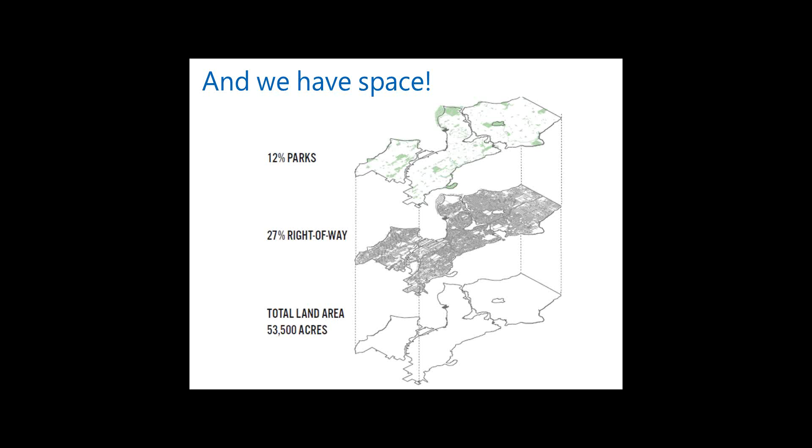So in 2013, we built a public space management program. In true Seattle fashion, we had a task force of 34 people, both internal and external stakeholders, and spent about 5 months defining the program's mission and goals, what's included in the program, and then prioritized a 5-year work plan, but tried to ensure we had enough flexibility to take advantage of opportunities.

As part of this program, we now manage about 40 different sub-programs and initiatives. Everything from alley activation to A-frame signs to farmers markets to newspaper boxes to parklets and beyond.

The other piece of building the program that I really want to highlight is our goals. We have 4 goals: to encourage, implement, innovate, and regulate. Part of what is so important about those 4 goals, and what's been really critical to the success of our program, has been changing the mindset within our department and division about how we manage public space and how we encourage people to use that space.

Public space management lives within our street use division, and that's the place where SDOT issues permits. For as long as most people can remember, street use was the place that you went to be told no. Sorry, we don't understand what you're trying to do, no. No, that's not about transportation, we can't help you.

So part of what we've done through public space management is really focus on our role as promoters and supporters of innovation as much as we focused on our role for regulation. So we're now a one-stop shop team. We develop programs, we implement them, we review permits, and we regulate. We enforce when necessary, but our goal is to work with people and not shut people down or stop people from doing what they want to do unless we really have to.

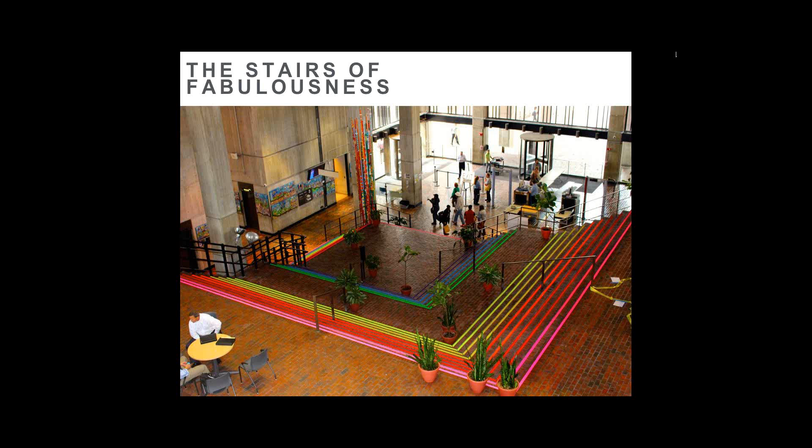This is what it looks like as of a couple months ago. We had the Stairs of Fabulousness project, which is skateboard tape. It was guaranteed to make City Hall 400% more fabulous by the designer, and the public certainly agreed with that.

Which is sort of lesson 2 we learned in that project: something as simple as putting down tape on stairs required a lot of legal counsel. Since then, as we've thought about doing this again, there are insurance questions we've tried to answer. We're setting up professional consultants for designers, architects, and artists who may not have done this type of work before, built into that award package.

The last part that we did around this project was we threw a party. We invited all the designers to come and hung up all their ideas. We invited the public and gave anybody who had submitted an idea an official button so they could go around and tout that. We gave everybody else free donuts and beer, which was an awkward combination, but people seemed to enjoy it.

And lastly, we gave the winners a green hoodie award. We were trying to mimic a little bit of the PGA Masters Tour, wanted it to feel sort of like an invitational. So we gave out these green hoodies to the 8 winners that we selected.

And this is kind of where we arrived, as we were reflecting on this project. This is the last lesson I'll share: it really wasn't about the project. This ended up being a trust exercise with the public and with the design and artist community. They saw that the city was really committed to actually improving public space with a small amount of money, but really trying to take their ideas and make them happen.

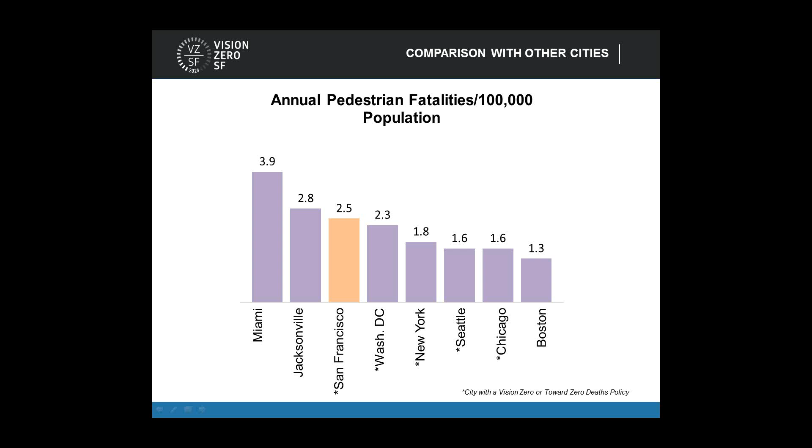There's a little asterisk under several of the cities that, at the time we created this slide, had either a Vision Zero policy or a towards zero deaths policy. And for a lot of folks out there, these things don't happen overnight, so I want to cover a little bit of the timeline of Vision Zero in San Francisco.

So when we look back to 2010, the then Mayor Newsom, who now is our Lieutenant Governor, issued an executive directive regarding pedestrian safety. That helped create a target and a multi-agency task force that really brought the Department of Public Health into the conversation with us at MTA. It created a greater sense of urgency and collaboration that we really needed within the city, with a goal of a 50% reduction of severe and fatal pedestrian collisions by 2021.

Going into 2011, San Francisco received a grant from the California Office of Traffic Safety to do the first phase of Walk First. It developed a framework for how the city was going to prioritize pedestrian improvements and created the first map of a high-injury corridor network within the city, showing the streets with the highest concentration of severe and fatal injuries, and also developed some draft policies.

Then in 2013, we had a new mayor, our current mayor, Mayor Lee, who as part of the nation's first Walk to School Day launched the San Francisco Pedestrian Strategy. This essentially reaffirmed the previous mayor's directive and added the targeted goals and framework that came out of Walk First. Then in 2014 was really the key year where Dana joined us on this project.

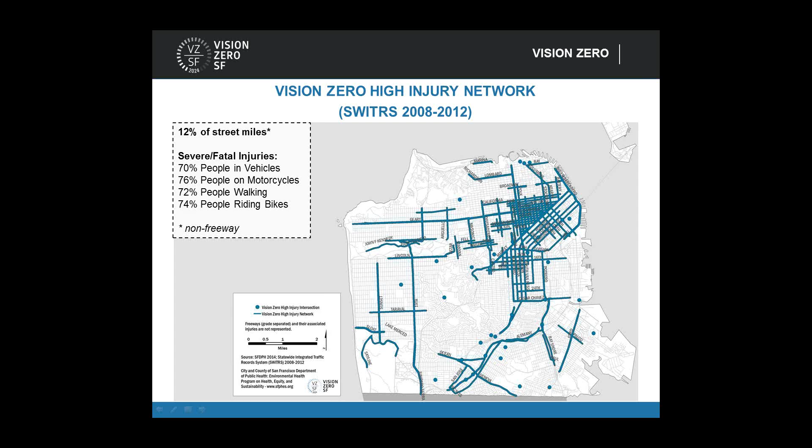So when you include all the modes within Vision Zero, we still see a distinct set of streets. We have now a focus of 12% of the streets within San Francisco where the majority of collisions are occurring. And that's our focus right now of Vision Zero, identifying our capital improvements on these streets. I'll end my point of the presentation with this slide that has our Vision Zero website.

Great, thanks Oliver. This is Dana Weissman now, and as Oliver mentioned, one of the most crucial building blocks of Vision Zero was the Walk First Pedestrian Safety project. Vision Zero in San Francisco really started with pedestrian safety, and Walk First was the city's first effort to define and prioritize its pedestrian safety capital projects. The goal was to develop a comprehensive and data-driven approach to replace the typical strategy of selecting projects ad hoc as they arose.

There were really two main questions that drove the Walk First effort. The first addressed the challenges of identifying site-specific capital projects on such a large city scale. And the second question addressed the funding challenge, how to make the most out of limited monetary resources. Fehr & Peers joined the effort in 2013, and we worked closely with the city team to develop a methodology that could help address these challenges.

The Walk First approach involved three basic steps. The first is to define the problem, where we generated collision profiles to describe the types of collisions that are most frequent and lead to the most severe injuries across the city, and also to identify where those profiles are most relevant. The second step is defining the solution. Here, through a comprehensive literature review, we identified the countermeasures that would be most effective at addressing the collision profiles defined in step one.

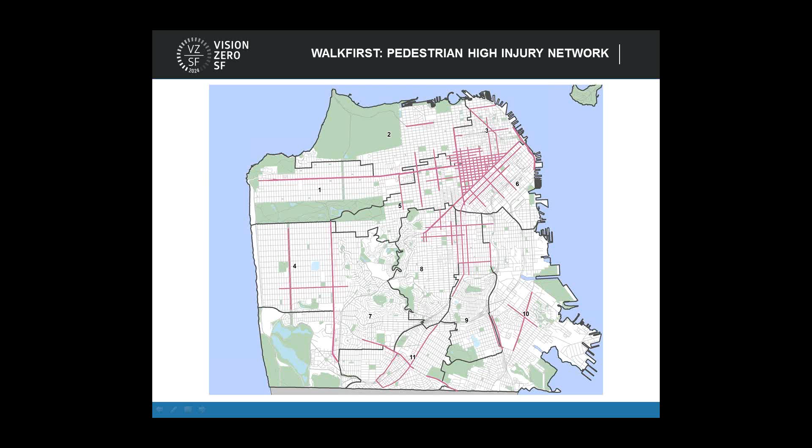We look to the data to determine whether the defining factors of a collision profile are present for a given crash, and if so, that crash fits the bill for a given collision profile. So for example, if a collision occurred at a signalized intersection when a driver made a left turn, the collision would be categorized under collision profile 4A, left turns at signalized intersections.

And we could map where across the pedestrian high injury network a collision profile was most relevant. So for this collision profile, left turns at signalized intersections, it described as much as 25% of all pedestrian injuries on the high injury network. It was the most common of the identified collision profiles.

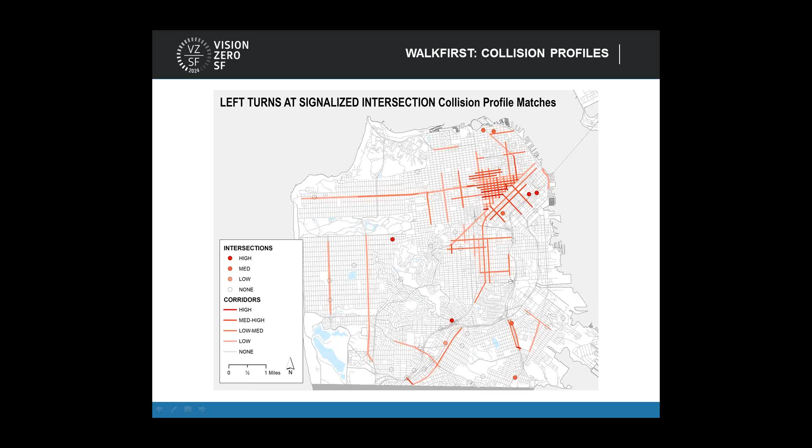The set of collision profiles was developed based on research of common causes of pedestrian collisions, local knowledge of the San Francisco street network, and an analysis of the frequency with which different collision factors appeared in the data. It was an iterative process. We used trial and error to identify a set of collision profiles that would be comprehensive yet focused enough to be meaningful. All of this information allowed us to categorize the different types of crashes occurring across the network, and it helped us tell a story of what was going on when people were getting hit. It also helped us define the solutions.

There are a number of possible treatments that could be applied at a given location, but some are more effective than others and work best under certain conditions. Some are also significantly more expensive to implement. Our challenge was to determine which countermeasures could best address the collision types we identified, then assign those countermeasures to the locations where they'd be most beneficial, and finally prioritize improvements that could be implemented at relatively low cost in a short time frame.

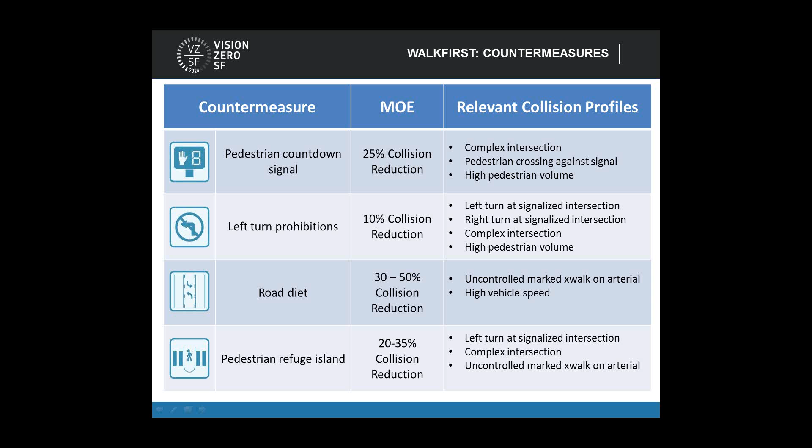We conducted an extensive literature review to quantify the effectiveness of every countermeasure and identify under what conditions they'd be most relevant. We compiled cost data to determine how much money would be needed to implement each treatment, and looked to example projects to estimate a time frame from planning to construction. Armed with this information, we were able to apply the most effective treatments where they were most needed to address site-specific issues.

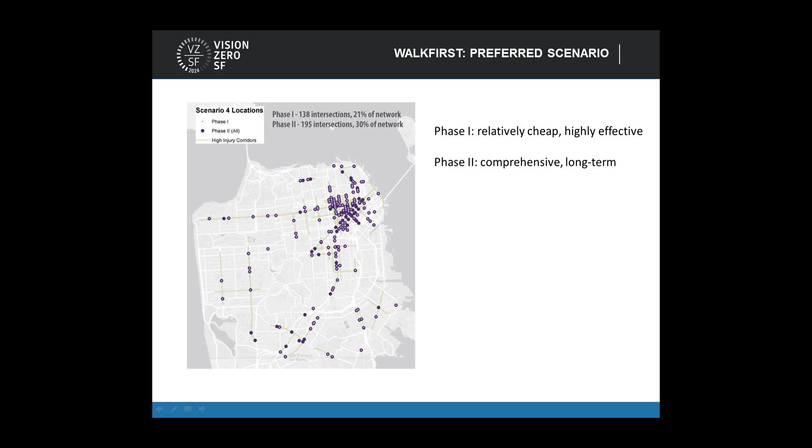So what we ended up with was a very long list of capital improvements to implement across the high injury network, but we still needed a way to prioritize these projects. We hosted charrettes with city decision makers to identify the metrics the city wanted to use to prioritize pedestrian safety projects. What came out of those discussions was a preference to first tackle projects that could be implemented cheaply and with high effectiveness, often with temporary measures, followed by a long-term rollout of more permanent projects addressing the most severe crashes. This process generated a recommended investment strategy for the city.

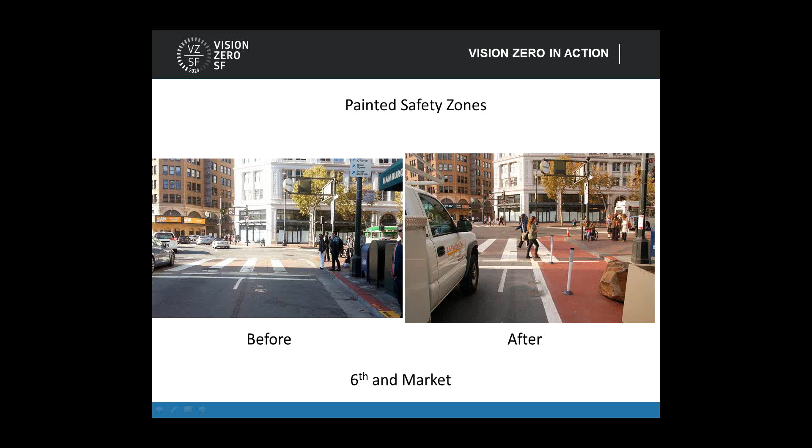I want to bring this back to Oliver's portion and show a recent example of a priority pedestrian safety project identified through Walk First that has now been implemented through Vision Zero. In addition to painted safety zones, the city has also begun to implement corner daylighting in the Tenderloin neighborhood, continental crosswalks across the city, and no right turn on red policies at selected intersections. These are just a few examples of Vision Zero in action.

And so that's it for our presentation. We're happy to field questions that people have now, and definitely please feel free to reach out if you want to talk more about Vision Zero or Walk First.

Good afternoon, everybody. This is David. I'm going to do most of the talking through the presentation, and when we get to questions, Ross and I are both available to answer those. We're here to talk to you today about our experience over the last several years designing intersections for protected bike lanes in Vancouver.

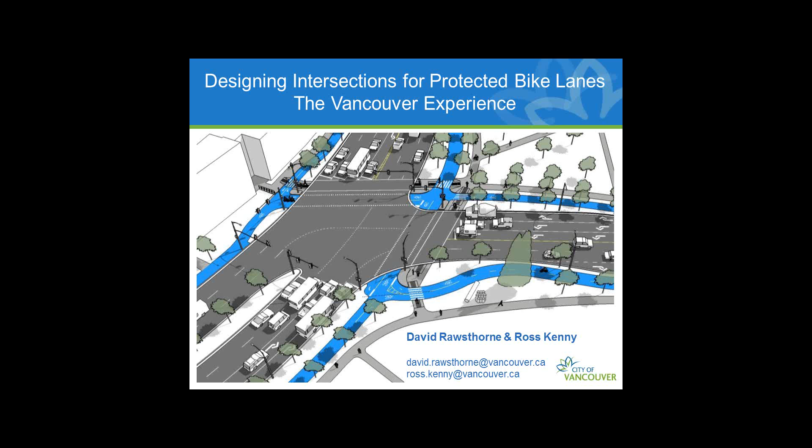The reason we think this is an interesting topic is that over the last several years there's been materials published that have given those of us who design these kinds of facilities better guidance about how to design protected bike lanes—documentation from Denmark, from the Netherlands, from Velo Quebec in Canada, and NACTO's Urban Bikeway Design Guide. They're all huge steps forward to help us do our work.

But one of the things that most of these design guides do is talk about protected bike lanes on the block, between the intersections and approaching them, but there's limited guidance as to how to deal with getting bikes safely through intersections, particularly intersections that connect to protected bike lanes.

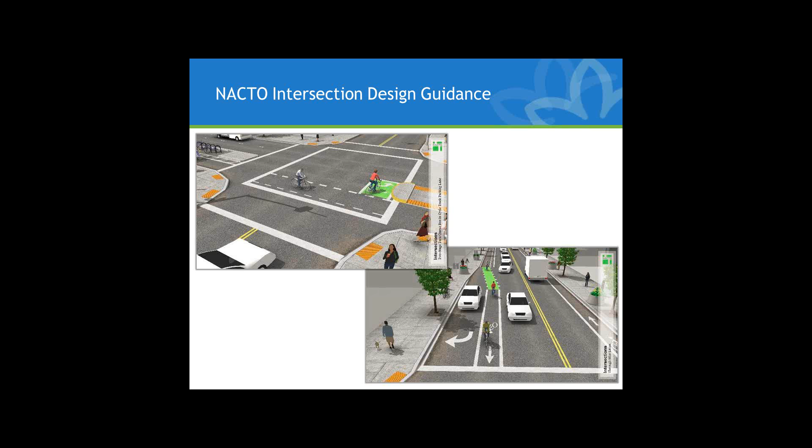These two photos are from NACTO's guide. The one on the bottom right is approaching an intersection. The one on the top left shows a single protected bike lane and how cyclists could transition through an intersection to make a left turn, but not all the movements that a typical intersection for cars would provide for—through, left, and right movements from all four directions.

Many of you may be familiar with an excellent video put together by a fellow named Nick Falbo, available online at protectedintersection.com. Unfortunately, the technology doesn't allow us to show videos as part of these webinars. Otherwise I would have shown at least a clip, because I think it's really important, and I encourage all of you to take a look. If you've got a paper and pen in front of you, write that down—protectedintersection.com—and take a little time to look at it if you haven't already.

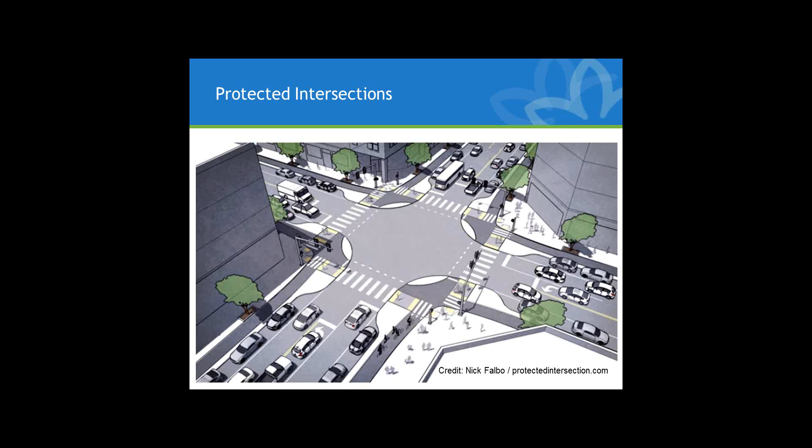This capture from that video shows what our intersections could look like, with protected intersections approaching from all directions and full protection of people moving through the intersection. We're going to talk a little bit about how some of the work we've done in Vancouver has tried to incorporate those elements.

Quick little pause to make sure you know where we are. We're in the southwest corner of Canada, a couple hundred kilometers north of Seattle. We have a very similar climate—mild, wet winters, sorry Boston, and modest, temperate summers. Doesn't get too hot here. We're a city of 600,000 in an urban region of about 2 million, right by the U.S.-Canadian border, and the conurbation really extends down to Portland, where there's several million more people in the Seattle-Portland area.

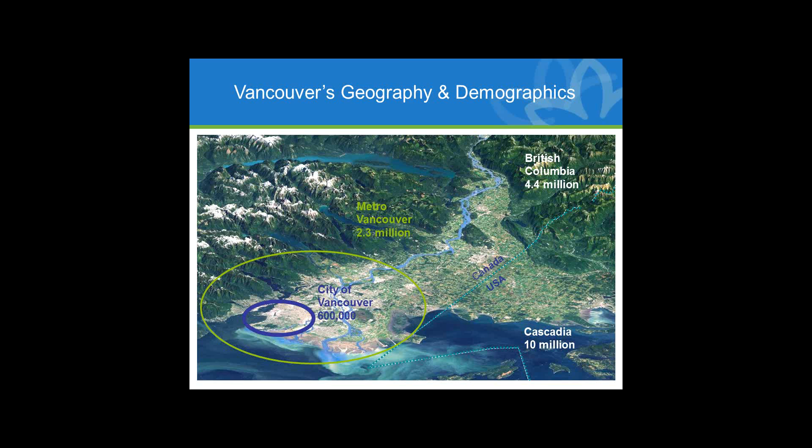We have some policy that's been adopted recently that builds on older transportation policy for the city of Vancouver. We've set ourselves transportation mode targets for the year 2040, where we want 2/3 of all trips done by sustainable modes—walking, cycling, and transit. Within that 67%, about 12% is bicycle mode share. We're at about 4% right now—pretty good by North American standards, but we still have some work to do.

We've been building bike facilities in Vancouver for about 25 years now, but for most of the first couple of decades, through the 90s and the first decade of this century, we were mostly building bike boulevards. The canvas we're working on in Vancouver is a fairly consistent rectangular grid network laid out about 100 years ago. We're bounded on three of four sides by the ocean, and we have a border with an adjacent municipality, and a fairly complete network of bicycle boulevards. But what we didn't have is much built bicycle infrastructure in our urban core, our downtown, which is on a peninsula, and some of the adjacent more commercial areas.

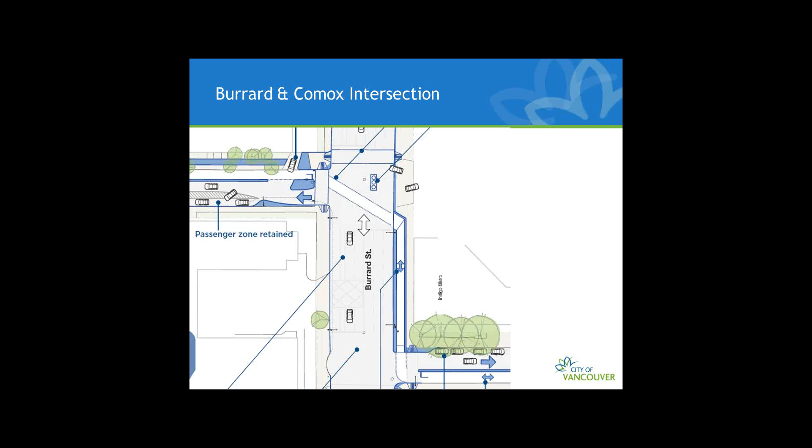So that leads us to last year, 2014, when we again took a big step forward, what we think now is a big step, and we moved west out of the downtown core itself into one of the adjacent neighborhoods, Kitsilano, that has very high bicycle mode share.

We have large areas of this neighborhood with about 10% bicycle mode share for trips to work. But some of the facilities in this area were rather lacking, and the bikes were there despite, not because of, the facilities we provided. So we built a new high-level bike boulevard with a high level of treatment, and constructed a couple of interesting intersections that I'm going to walk you through.

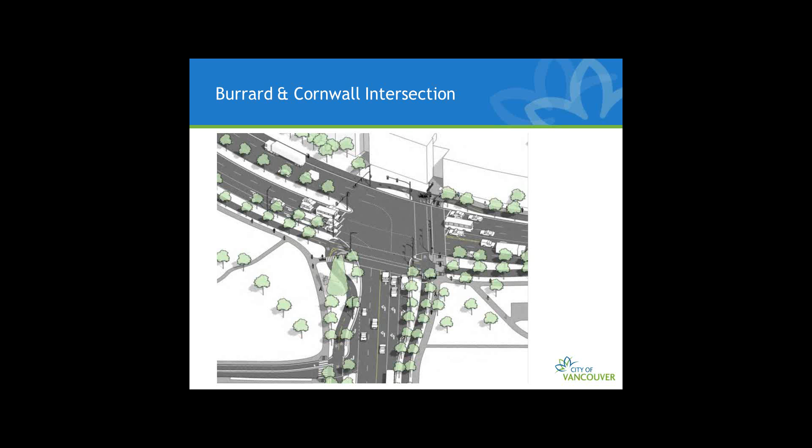Another view of the intersection. In the past, what you had separating bikes from vehicle traffic was a little bit of white paint. Today, cyclists approaching the intersection are fully separated from traffic by a curb, a strip of grass with some trees, and then they're riding on a paved bicycle path separated from the road.

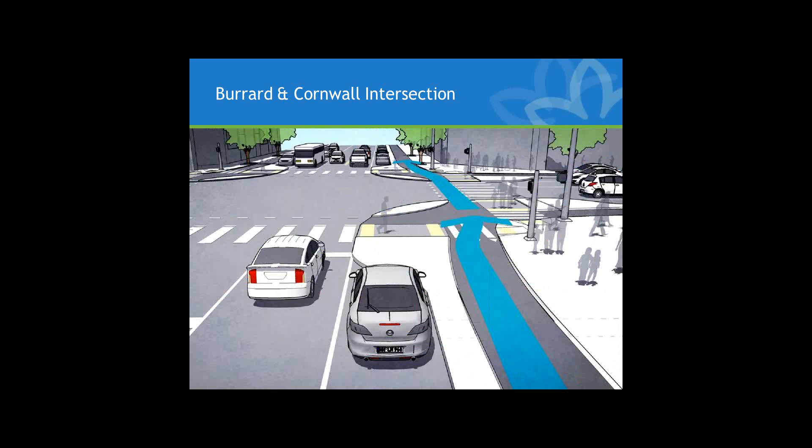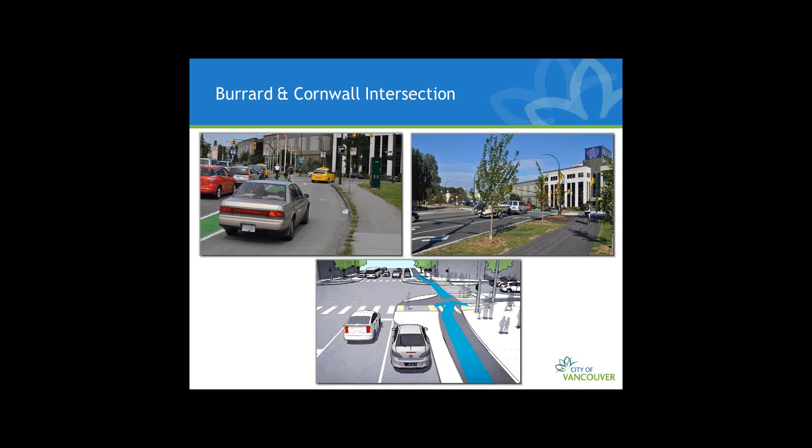If you're familiar with the protected intersections video, this screen capture might look familiar. I show you this because when I was looking at that previous photo, I was reminded of this perspective in the video. What you see there is really the same configuration we had built, matching what Nick Falbo's video showed for positioning cyclists separated from vehicle traffic. In his video's case, he's got a row of parked cars. In our case, we have some grass and trees. Functionally, they work the same.

So I'm going to explain how the intersection works for cyclists. For a cyclist coming from the Burrard Bridge heading southbound, they can make all the movements they want. They can turn right, continue straight through, or make the left turn as a two-phase left turn across one street, wait, then across the other street.

So instead, we made the two crossings that remain two-way. Instead of cyclists circulating through the intersection counterclockwise in all legs, the northbound to westbound movements need to do a bit of a zigzag, and those crossings become two-way crossings for bikes, not just one-way. So they're more similar to a pedestrian crossing in that regard. That's where we ended up.